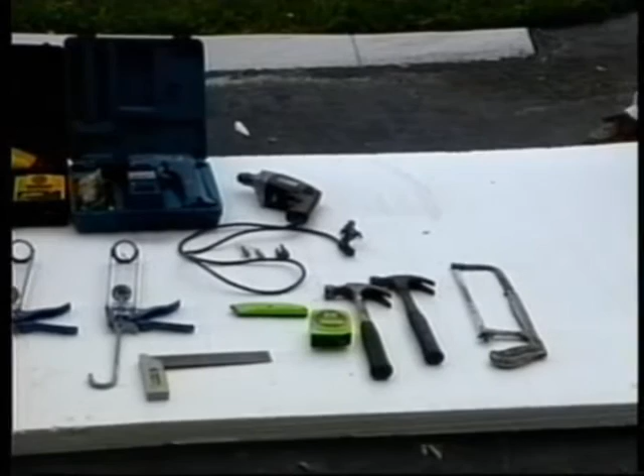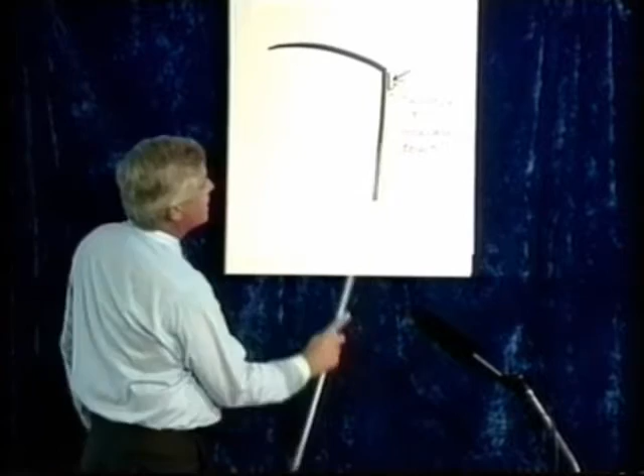The first application of the mobile home roof over will be the side fascia. This T-shaped piece is what we refer to as fascia. This area on top is 2 inches. This little area, known as the drip edge, is 1 inch. The face of the fascia is 6 inches. This piece belongs here. However, generally, you'll find that the drip edge or the awning rail protrudes out.

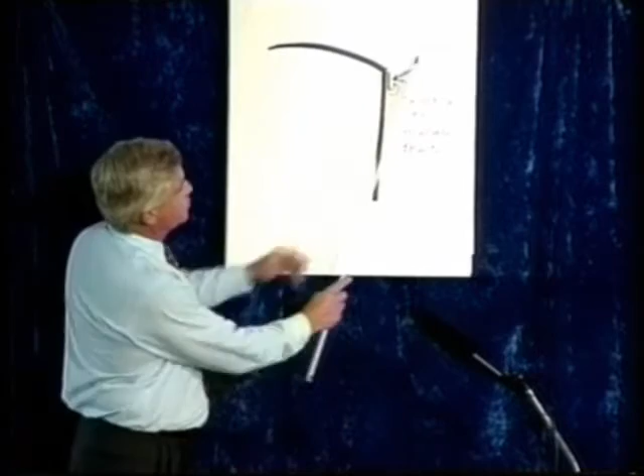Sometimes there's a gutter there. That has to be cut off if it's an extruded piece. But if it's a roll-formed gutter, if it's a flimsy little piece, that can be hammered in or hammered down. So this is a very important piece, which allows this piece to fit flush up against the side of the home.

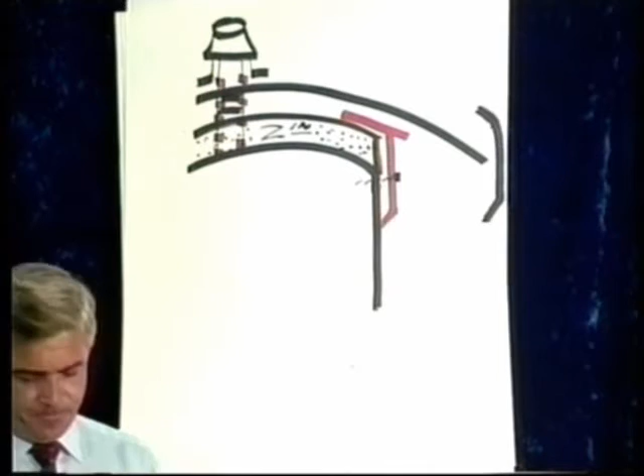All right, this is the existing mobile home roof over as you saw on the previous page. The drip rail was right here. This red area indicates that fascia we talked about, 6 inches from here to here, 1 inch drip edge and 2 inches which is covering the foam. What you do at this point is you take all of the fascia, which is the red, and you lean it up against the home.

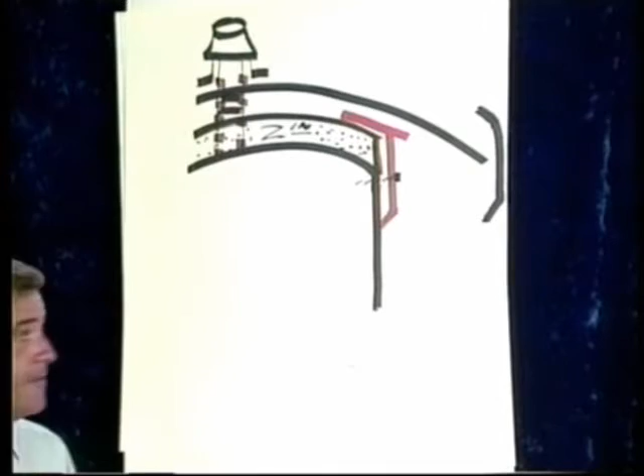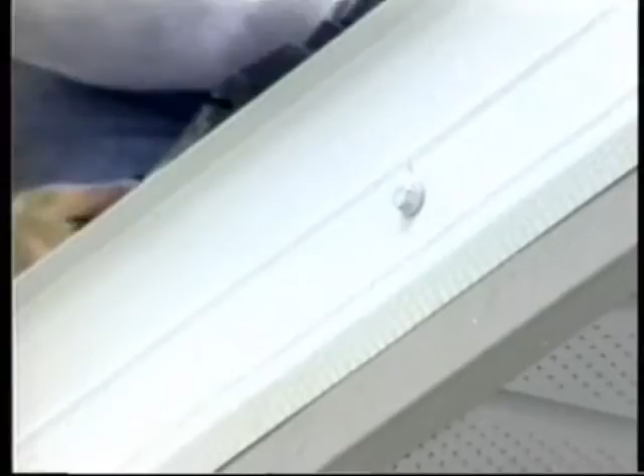Make sure that you take each piece of fascia, which is 14 feet in length, and you mark on the face of this fascia every foot where you'll be placing the nylon-headed bolts. So when you're installing this, the nylon-headed bolts are installed a foot apart, and that way the job looks nice and neat as you go through.

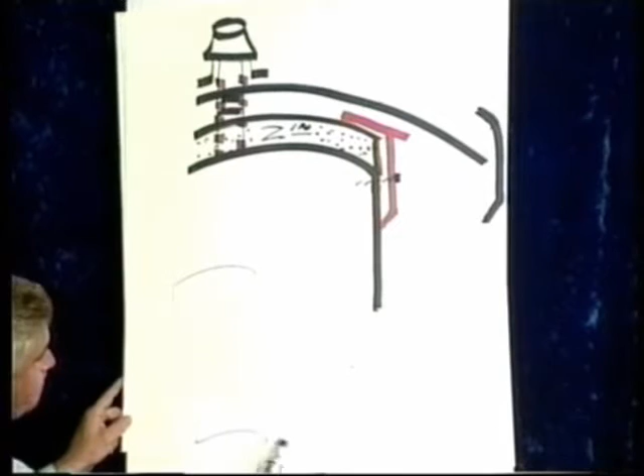But before you make that installation, take 1 piece of foam up there with you. You lay it lengthwise. In other words, if I'm looking at the mobile home from up above, and you're going to put the fascia down this 60 feet, that piece of foam is going to be like this. And you're going to lay this piece. You take this piece of foam, move it over here, and you lay the next piece, and the next piece, and the next piece. Because you're only going to use 1 piece of foam to gauge the 2 inches from the existing roof to the top of the fascia.

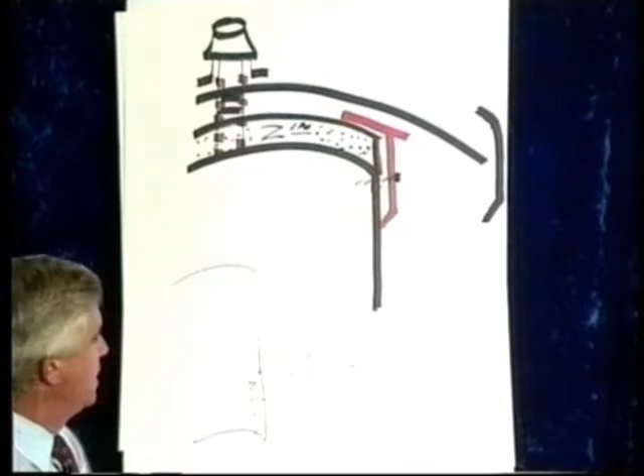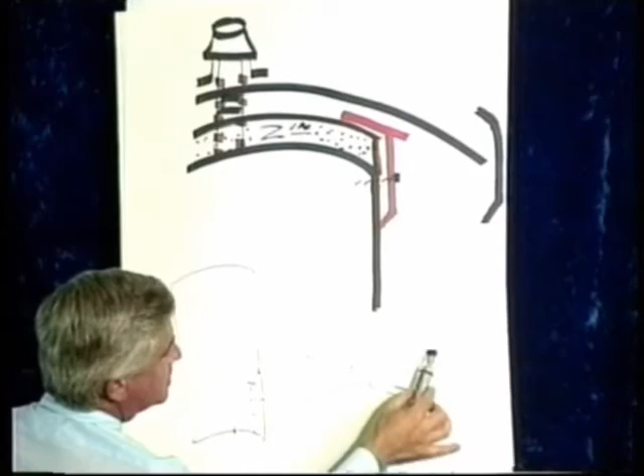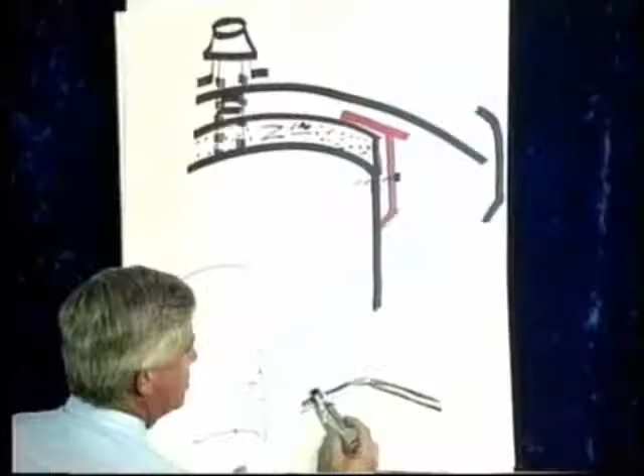When you're installing the fascia, you can start right at the peak, or right in the middle of the single wide, for instance. If this is a single wide, you can start right here, come down to the outer corner, snip the top of the fascia here and here, and wrap this around the side. So now you're running down here. And what you're doing is actually taking this arch like this. And now, with the fascia, you're able to gable this home so that it has the appearance of a newer home today. But only the front panel will do this, because all of the other roof over panels will be arched so that you can walk on the roof.

But right now we're concerned about putting the fascia completely around the perimeter of the home. So again, let's start in the middle of the single wide, run down to the edge, putting your bolts in 1 foot apart, snipping the fascia only on the top and the drip edge and the back side, and flipping this around like this, and then running down this side here.

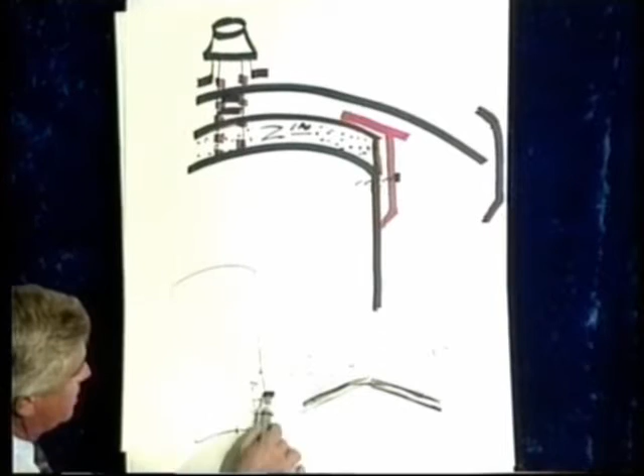When you get to the back, you do the same thing, running this piece back here, and where they meet, you just fill in. So you've completely gone around the perimeter of the home. Okay.

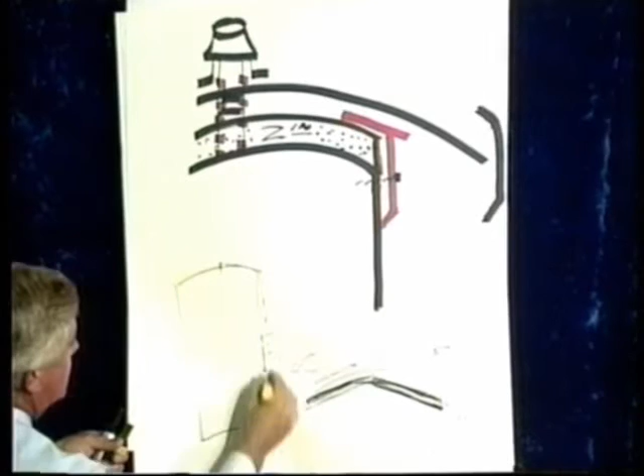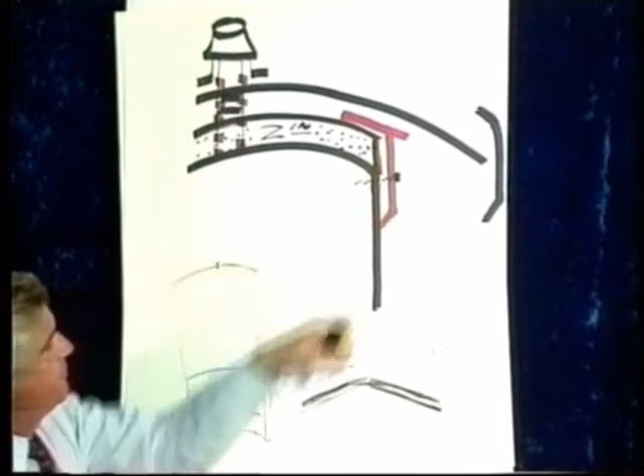Now that this is done, now that your fascia is on, this is the fascia. Now that the fascia is on and you have a bolt in every 12 inches, it's time to lay some panels. We're going to lay down 2 pieces of foam. Again, we're looking down on top of this house. That foam, which is 12 feet in length, for instance, will run from here to here. That's the foam. And the foam will tuck underneath the fascia, just like you have there.

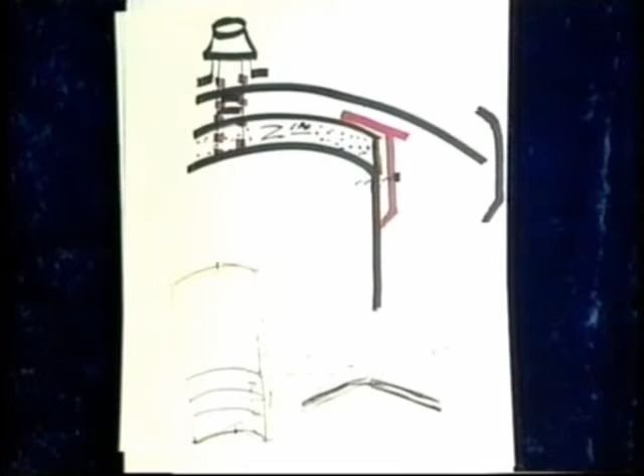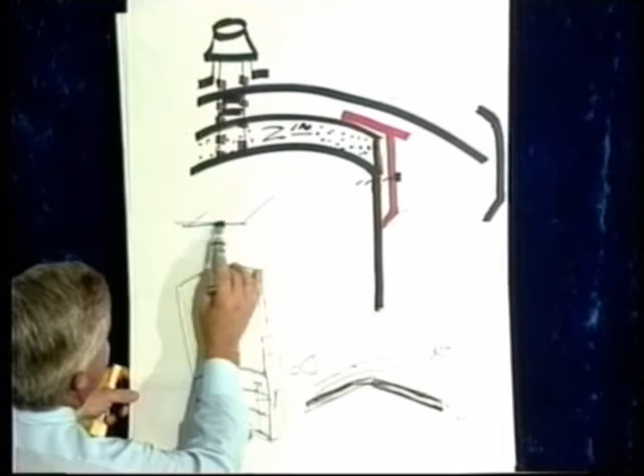The first panel, which is the key like anything, the first panel has to be installed square to the front. Generally, the overhang is about 4 inches. So if you look at your roof panels, you'll notice that the panels have 5 or 6 areas and 5 ribs. If you just have the second rib showing on your front overhang, that'll give you the 4 inches. So if you were to take a look at the front of the house, there's your fascia, like this. Your panel is coming out 4 inches beyond the fascia.

Each panel is factory sealed. You take a look inside of those standing seams and you'll notice a light gray caulk. That caulk will never ever set up. So in the event that you ever have to replace a panel because of a tree limb, whatever it might happen, those panels can be easily removed. And that sealant keeps the water from infiltrating the home.

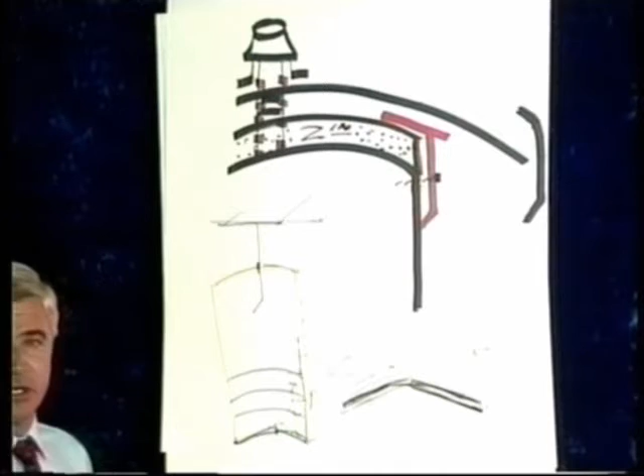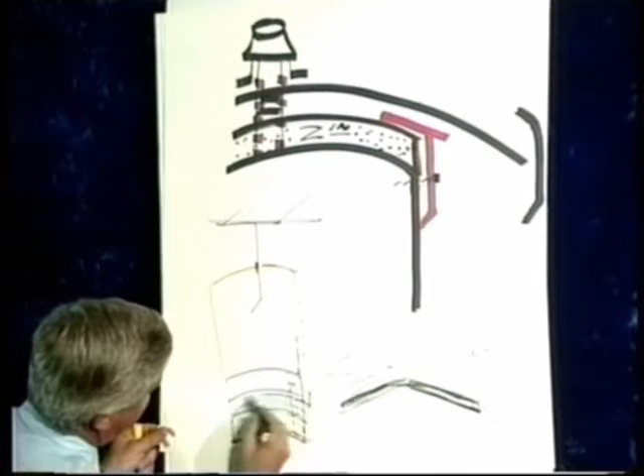When fastening a panel down, it's important that you, again, hit this area here. You can see in the pictures that you constantly fasten this down. The screws should be every 2 to 3 inches on the front of the home. And on the side of the home, as these panels are running, they're 1 foot wide, where your foam is 4 feet wide. There are 12 fasteners per panel. There are 6 per side.

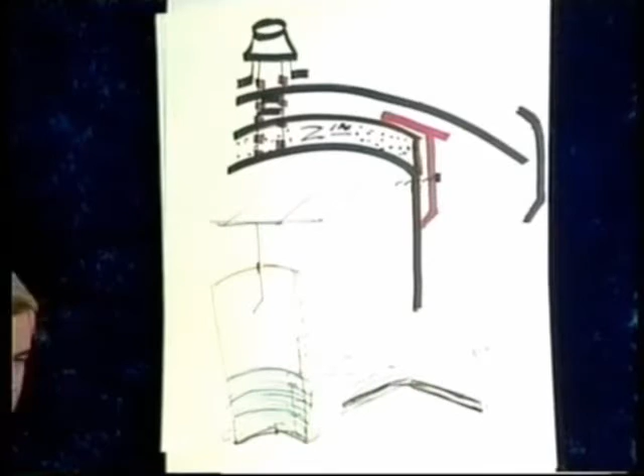And when you get that first panel in place and you go to set your second panel, it should take 2 people, 1 on each side. 1 person has the tape, constantly measuring from this point underneath that drip edge to the outer edge of that panel. Should read 6 inches if you've allowed for 6-inch overhang. 1 person is measuring each panel as they put it down. Then on top of that panel you have 6 fasteners. Those are the fasteners with the neoprene washer on it.

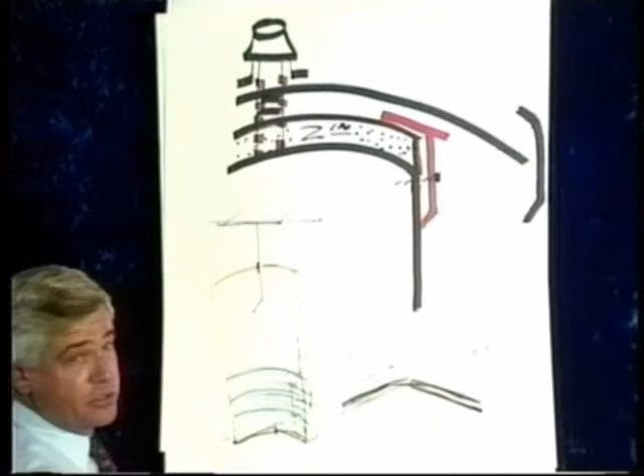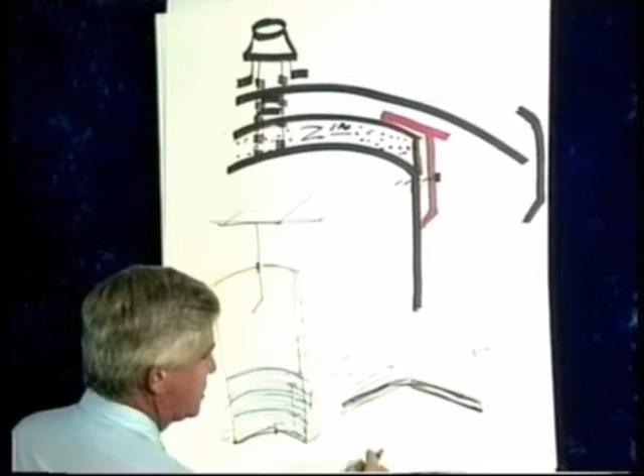When you're installing your first pan, since we have taken the arch out of the appearance of that single wide, and we've now given it the appearance of a gabled look, only that first panel will be snipped on the standing seam. So let's draw what the pan would look like. Here's your standing seam, like this. Well, as it's going up to this point here and coming down this side, you're going to have to snip it to allow that to happen.

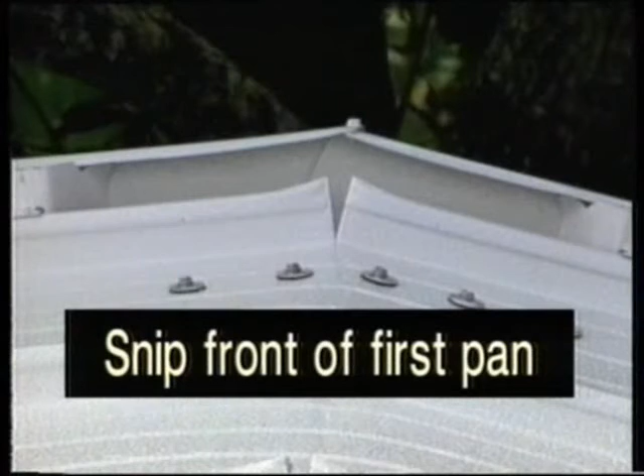Now, in most cases, this part here will arch over without having to snip it. But on the front, for that gable, it will have to be snipped, and that'll give it the new conventional look. But from here on out, all the pans are arched. Every panel will be arched.

Interesting thing that we do at Madden Manufacturing is that when the job orders come in, the salesman will tell us that the home, for instance, if you're looking at the front of the home, from here to here, in other words, this is an imaginary line from this corner to this corner, and this might be 6 inches from here to here. These machines will arch that panel to fit that home. Every job is custom made.

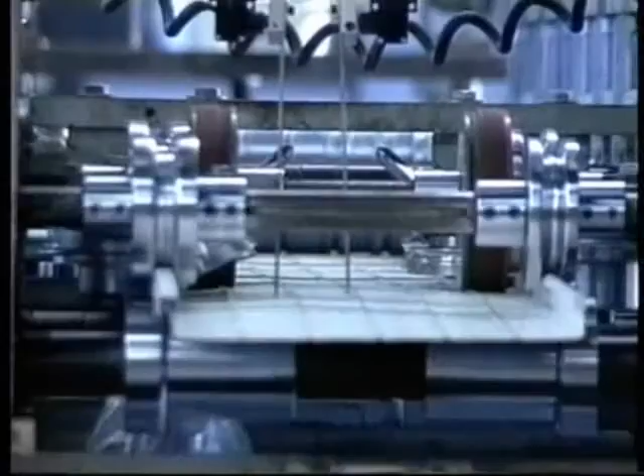So it's up to you to tell us what you need, and we'll manufacture it that way. Because if it's custom made, the jobs go along much easier, they look much better, and the referral business is great for the salesperson.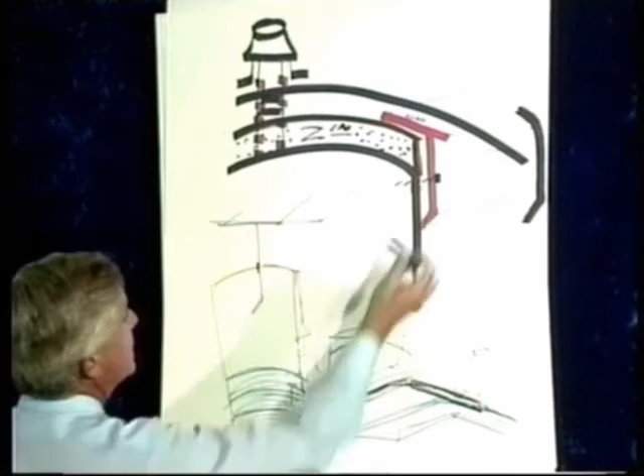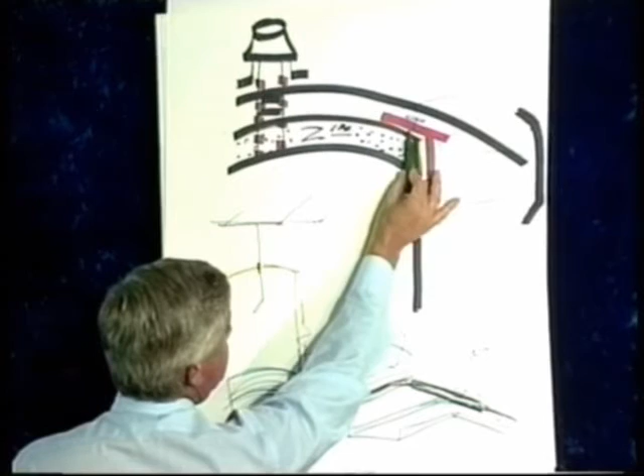You'll notice in your box of materials that there are several tubes of Permaseal. Permaseal is an adhesive, and that adhesive goes right on top of the fascia. One nice bead of adhesive, and then the fasteners will go through the adhesive into the fascia. Be careful now to hold those fasteners back away from the drip edge so that you don't have your fastener coming through the outer edge. You want it back, just back in a little bit, maybe about a ½ inch from the face. And this will be your screw here.

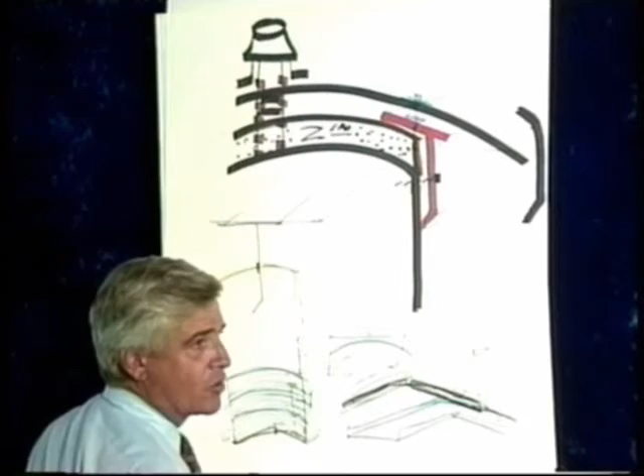So not only is each pan fastened with 6 fasteners per side, but it's also glued down. And it does 2 things. It holds it in place because we have to meet 120-mile-an-hour wind loads, and it also keeps the water from backing up. That's correct, 120-mile-an-hour wind loads in order for us to sell the product in Florida.

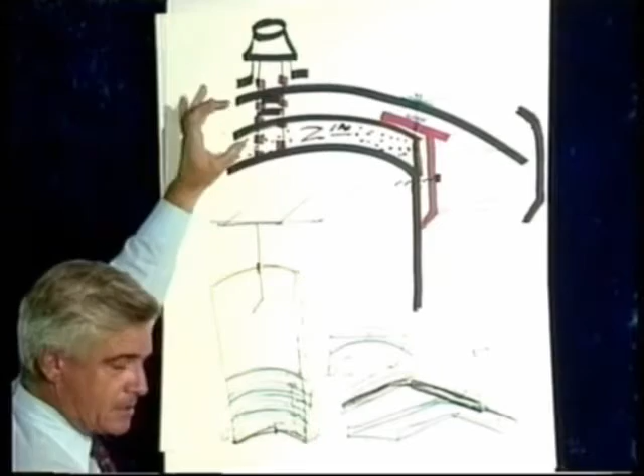All right, and when we get to a vent situation, and you contractors understand there's about 1.25 inches, 1.5 inches as far as the PVC. What I would like to see happen is that the existing PVC extend beyond the 2 inches of foam. And in most cases, when you remove the old breather vent, you'll find that the PVC pipe is far enough beyond the insulation that it'll go up on top of the panel. And that way, when we put the new vent on, we can seal around the PVC and the new roof.

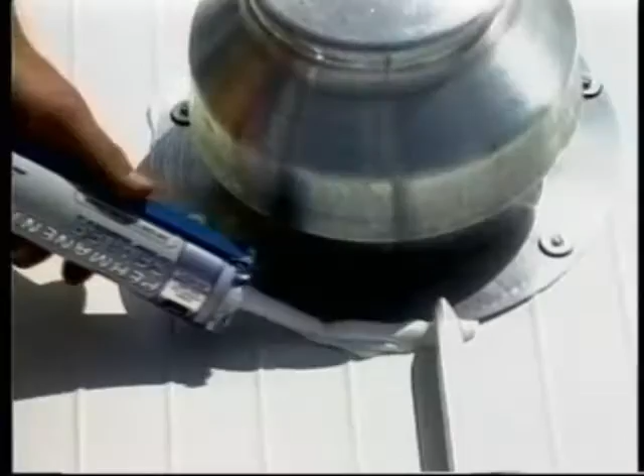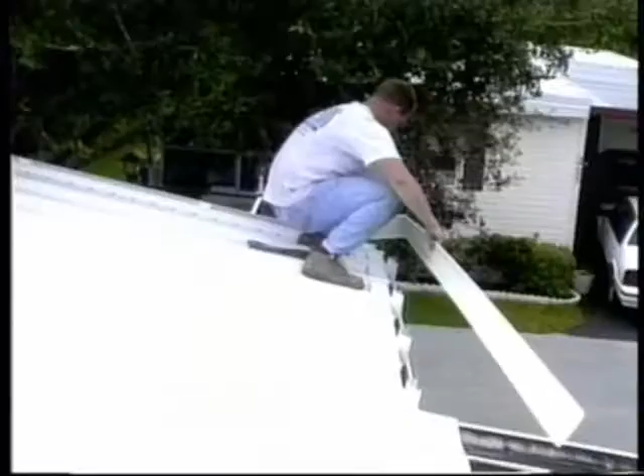And then we put the new pan on. So this is the pan, this is the vent, this is the new vent that would sit on top, your C-trim, just to kind of give you a general idea of what we're going to talk about.

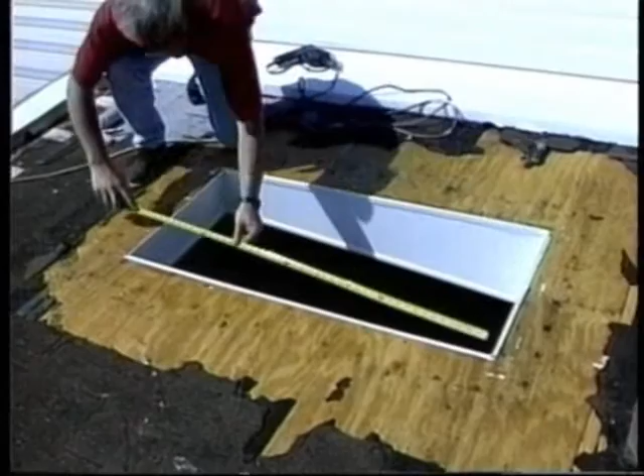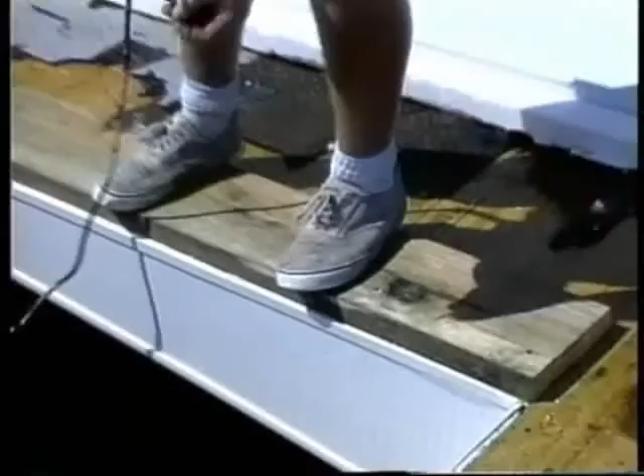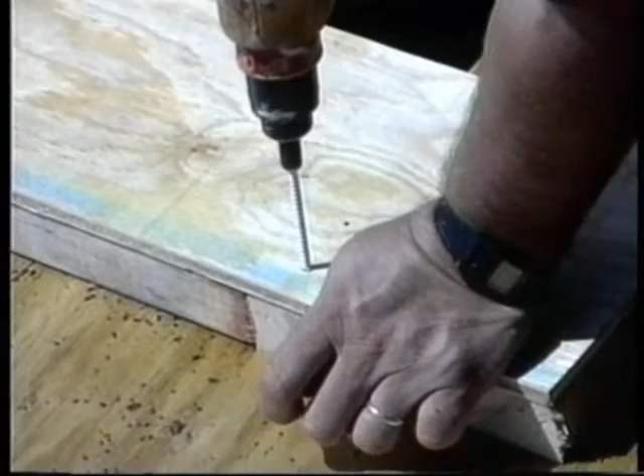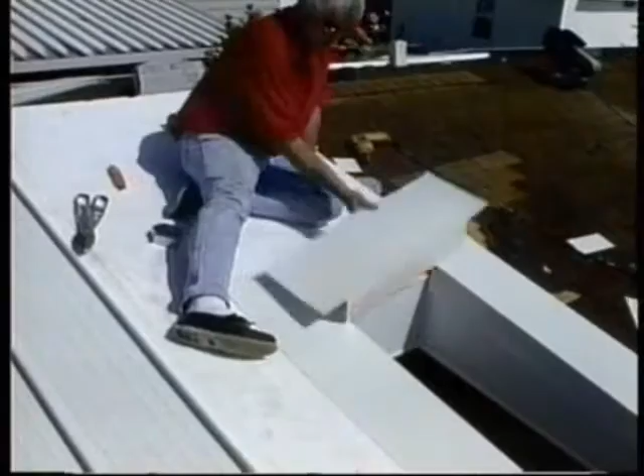Well, we know a 2x8 is about 7.5 or 7.25 by 1.5 inches. But we're using 2-inch foam, so we need to make up another ½ inch difference, and that's where the ½ inch ply comes into place. So what we do is we take this and picture frame this completely around with 2x8s and ½ inch ply. We also will send you coil stock, and the coil stock goes right on top of the 2x8s. So this is now wrapped in coil stock, this whole area.

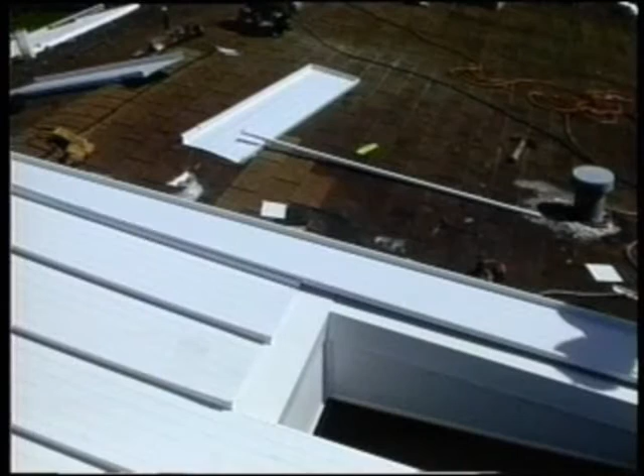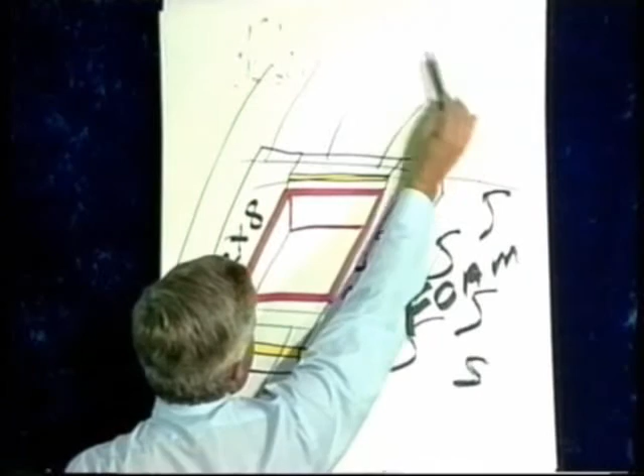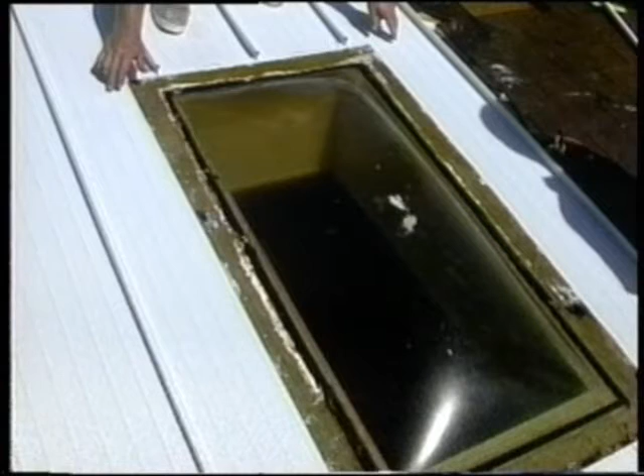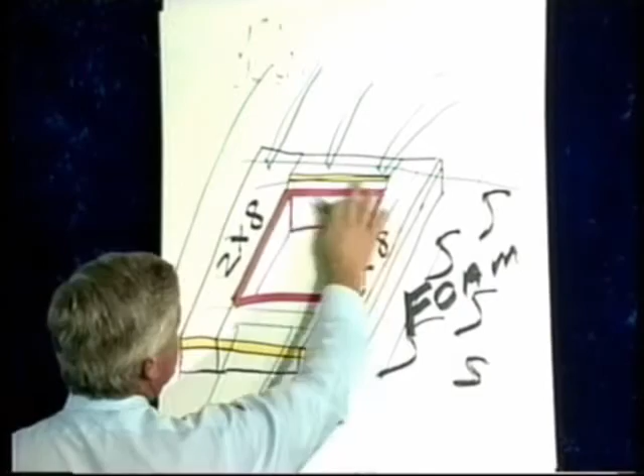So the standing seam of the roof panel will never come in contact with the bevel of the skylight, because if it does, the water will never travel around the skylight and will dam up here, and we've got a problem later on. So always hold it back. Now, with the Permaseal underneath these roof panels, when you go to put your fasteners in, you now have something to put your fasteners into, which is the ply and the 2x8. And that's how that's done.

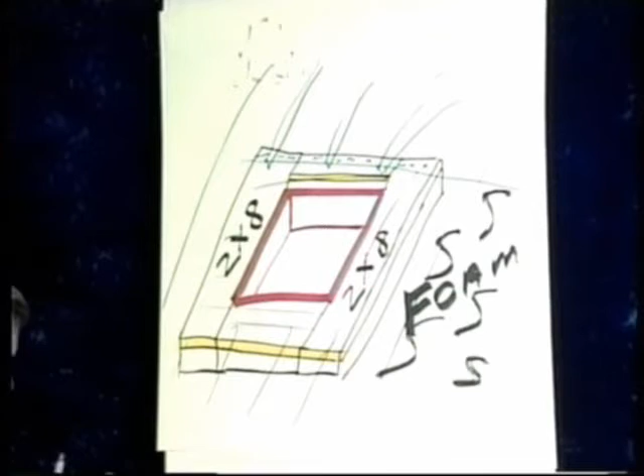After your 2x8s are on and your coil stock is on, you put your new skylight on, and then you run your roof panels right on through.

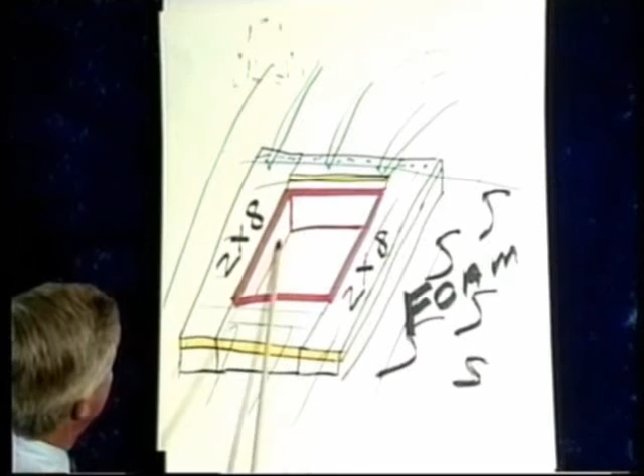Let me talk about finishing off the skylight. Once you've done your coil stock and your 2x8s and your ply, you're going to find there's going to be a slight void around the inner skylight area. Simply take some coil stock. You're going to have some material left over from the roof. If you've got a good straight 2x4 or a flatbed pickup truck, you can bend the metal there, and you can place it around the inside of the skylight area, generally in this area, with some good silicone caulk, and I think it'll be acceptable by the homeowner.

But take a look at it, analyze it, see what you think you need, and make sure that everything's ready, because when you get through that skylight area, you never want to go back onto the roof that you've just finished. You want to complete it as you go. And that includes the vents, like I had mentioned earlier.

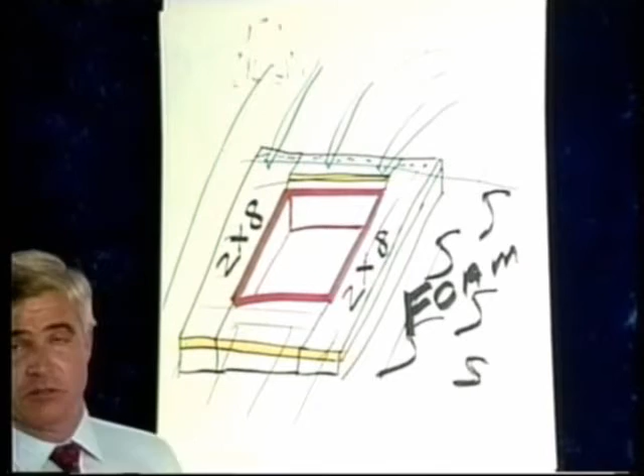Let's discuss a room addition that is built on to a mobile home. Or this could be a carport or a patio cover. The interesting thing here is that we're not able to install the fascia the way we discussed earlier, because you need those nylon-headed bolts to go into the top frame of the existing home. So what we've done here, again, we've talked about the 2x8s and the half-inch ply with the skylight. Well, the same thing would apply here.

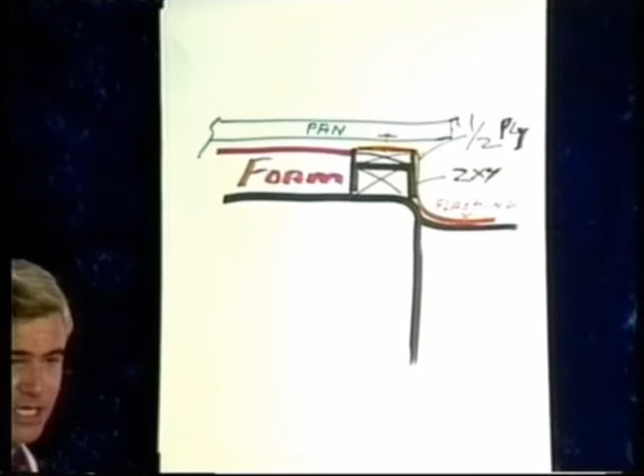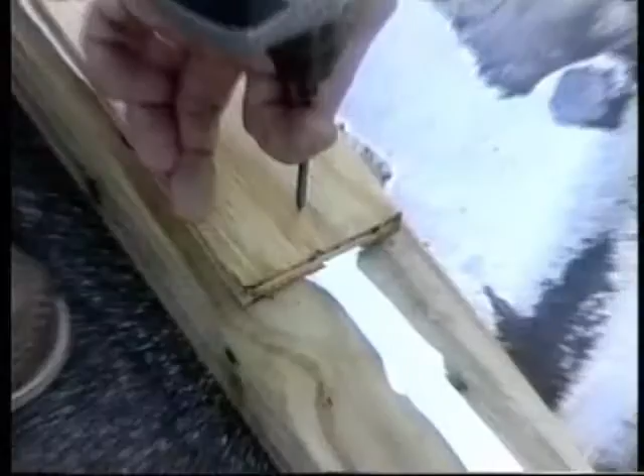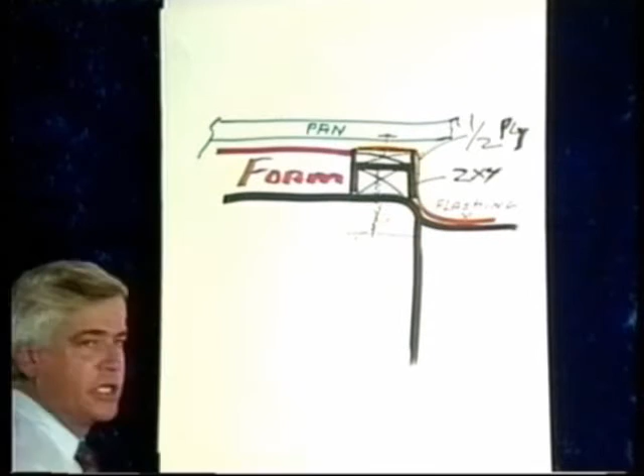You have a 2x4, half-inch plywood. You now have a full 2 inches of wood and your foam. Now, naturally, you're going to have the wood fastened down into the top plate of the existing home. So these are all screwed down with fasteners to hold these in place. It's not a bad idea to use Permaseal between the 2x4 and the old roof, between the ply and the 2x4, between the flashing and the ply, and between the pan and the flashing, just like a big sandwich. And what you've done is actually sealed everything with a caulking and glued everything together.

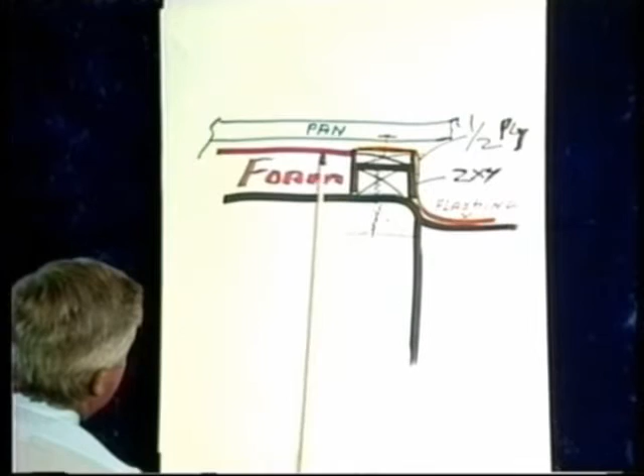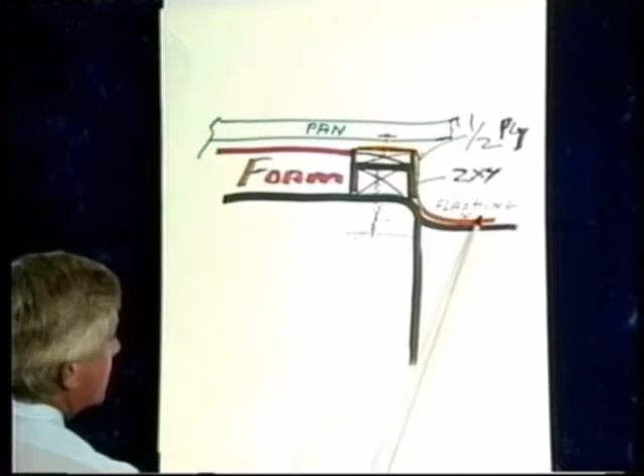So let's take a look at this one more time. This is the existing home. We can't put the flashing or the fascia on here and put a bolt in. So how do we attach a new roof? You have to build this up with 2x4s and half-inch ply. You're going to sandwich this all together with Permaseal. Now you've got a full 2 inches of wood. That's your foam. You're going to put your flashing down and onto the patio cover, carport, or room addition, or whatever this might be over here. Put some fasteners in. You lay your pan on top of that flashing, and you fasten down.

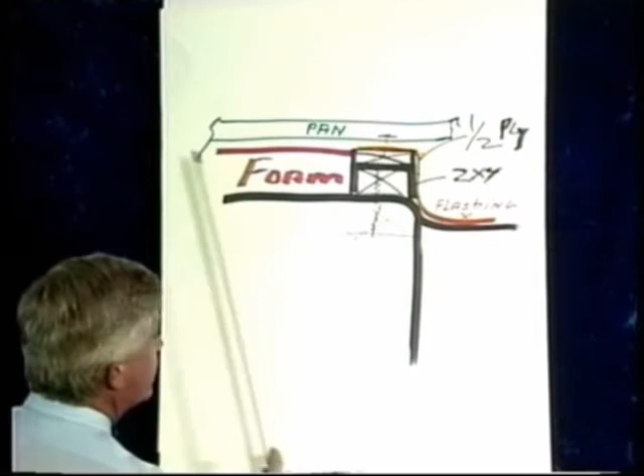That's the way this situation is handled, because there's no way that we can get our flashing, our fascia, on the home because of the addition. So this is where it should go, but we can't put it there. If you have any questions, just review this, and we also have some information in the catalog.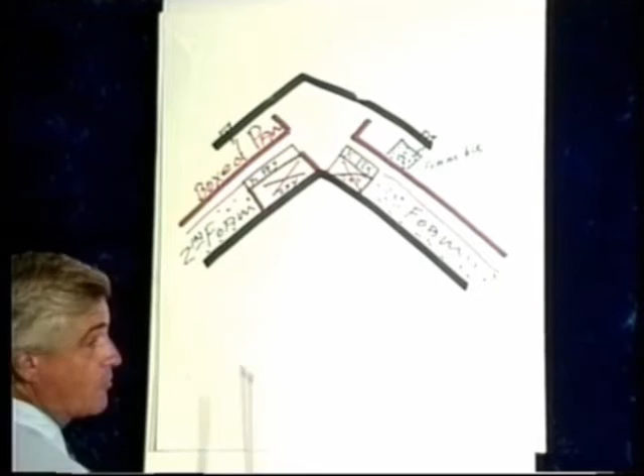So when this job comes into you, as we said in the beginning, check that packing list. Make sure everything is there to do the job. Don't forget the wood. Don't forget your plywood. We don't ship the plywood, we don't ship the 2x4s, and we don't ship the foam. So make sure that all these items are there. We will send you the box pans. We will send you the styrofoam blocks. And we also will send you the ridge.

Once the 2x4 and ply is in place, then your foam goes up against the back side, down to the fascia, and let's pretend we go like that, and this is the fascia.

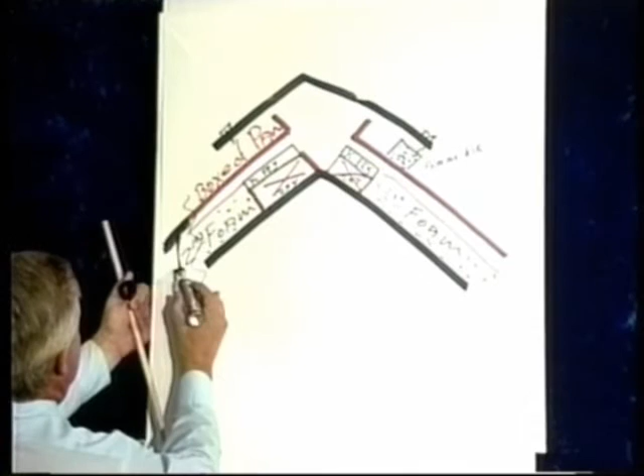Remember that? Your fascia bolts, they're put in every 12 inches. The roof pan is put on. There's permaseal on top of the fascia, and this pan is going to extend 6 inches out if it's sold with an overhang, which it should be.

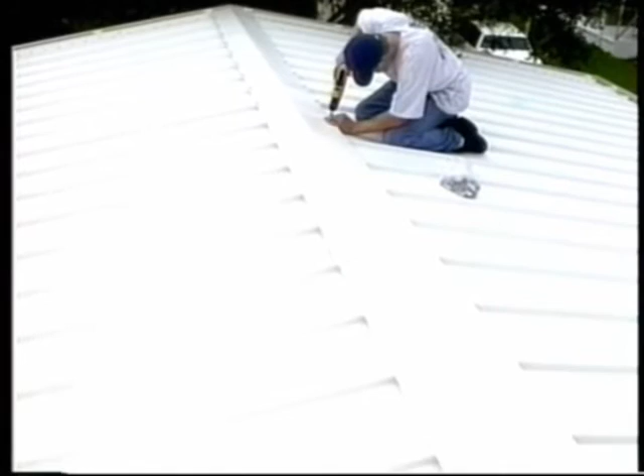And once this pan's in place and this pan's in place, the next item is to put your ridge cap on. Make sure it's nice and straight and true. Use a pan fastener, that's the ones with the washers, on top of the standing seam. So this is setting in place now. The last thing you put on are the foam blocks. And usually the foam blocks are put back in about 1 inch from the edge. Keep them out of the sun, so about 1 inch from the edge.

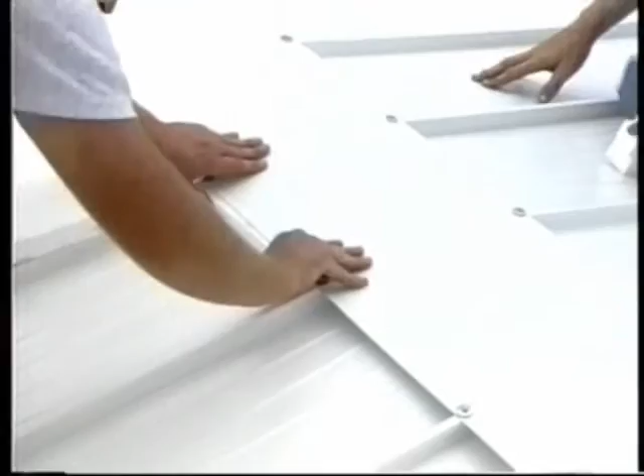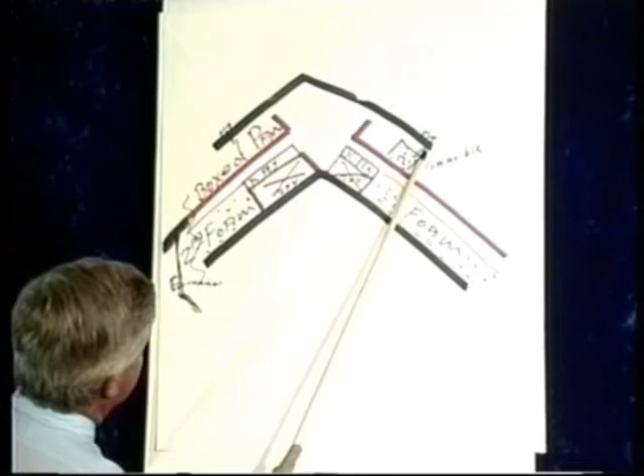Now, here's the reason behind this. In the rain, the ridge cap is your first line of defense. Your second line of defense is your foam block, which keeps the water from blowing up in here. And if it does get by this foam block, it's going to have about 3 or 4 inches of void, and then you have your boxed panel. And this actually is going to be sitting on top. So it'll be very difficult for a high wind to blow any moisture into the ridge cap area.

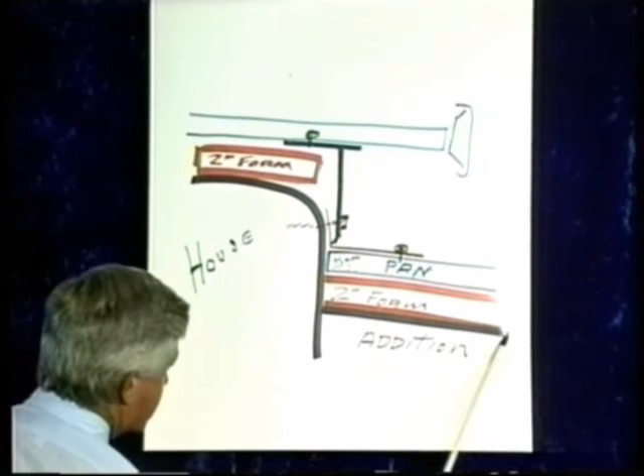Let's talk about an addition on the home, where the addition is not level with the existing roof, but down, so we can put our fascia alongside the home. We're not using the 2x4s and plywood this time. All right, this black line represents the existing roof. This black line represents the addition attached to the home.

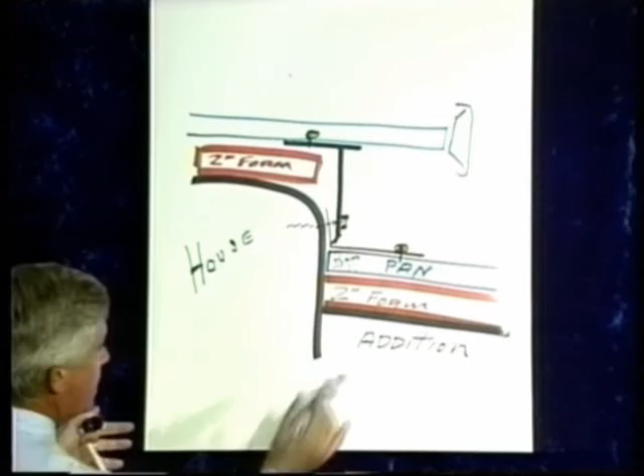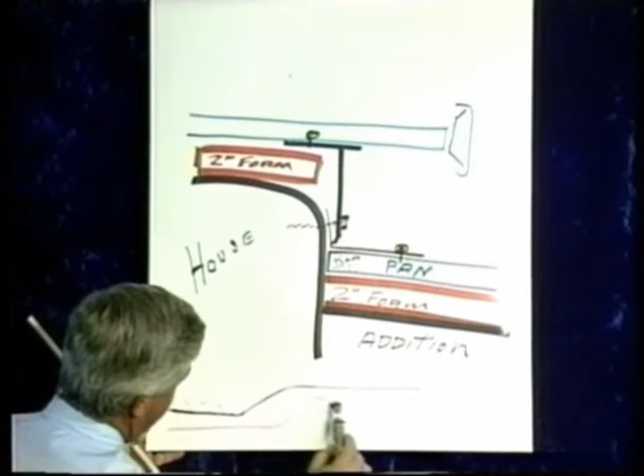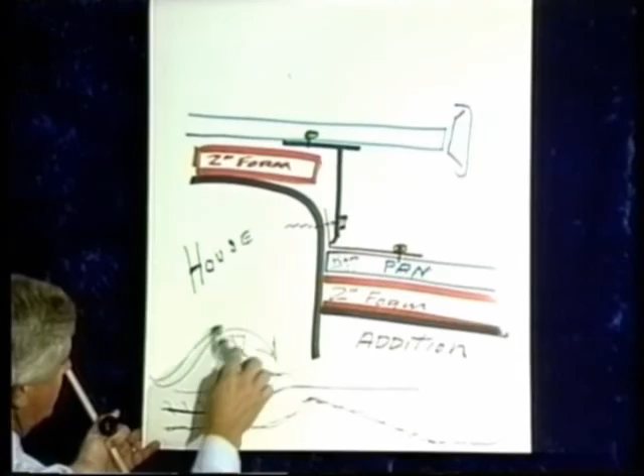Always, always, always do the lowest part of the roof first. The lowest part of the roof in this area happens to be the addition. But if you even had a home that went like this, you're going to do this first. If you had a home like this, you're going to work both sides to the top and then cap that off up there. Now the reason for that is if you start from the low end, your standing seam is not going to allow water constantly beating away at the sealant. The water will actually go this way, and that's the way you want the water to go. It'll cascade over the standing seam correctly.

So what we have here is the addition, 2 inches of foam, our boxed panel, our flashing, and once the flashing is on now, this addition's done. It's finished. Then we go to the main home and we put the fascia on over the flashing. These nylon-headed bolts, which are installed 12 inches apart, are going into the top header of the existing home. Don't forget now, you've got to gap this 2 inches, or whatever the thickness of foam has been sold. I would say that 999 jobs out of 1,000 are sold with 2-inch foam. 2-inch foam is pretty much standard in the industry.

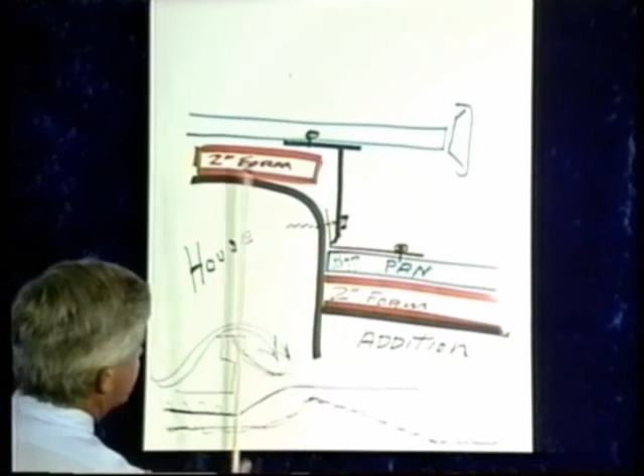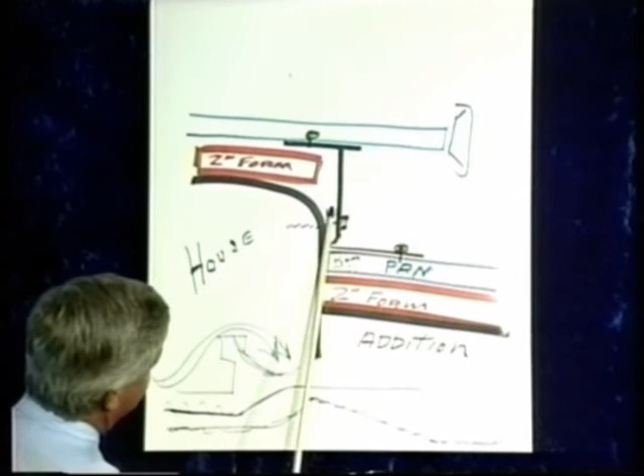So once your fascia's on, you can start putting your foam in, you start laying your pans, and this is the way you would treat an addition that is, let's say, 6 inches or lower from the existing roof. We'll break all this up for you, so we need to know what the dimension is from here to here, so we can ship you all of the coil stock, or we'll break it up for you.

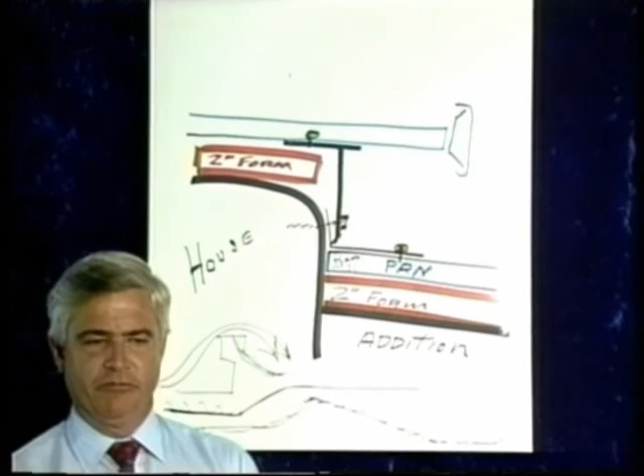Let me take a moment to talk about furnace flues, hot water flues. As you're progressing with your roof, you're going to come up against a furnace flue or a hot water flue. That flue should be removed and reinstalled. That flue should be reinstalled by a licensed heating or air conditioning contractor. It's very important that you protect yourself if you're not sure of what you're doing when it's involving a furnace flue.

And as far as the other items to watch out for, there are the high tension wires. Many of these homes have high tension wires running across them. There are trees and so forth, so just be careful when you're installing these roofs. Take a moment, look around at the job site, and make sure there aren't any hazards. And if there are any hazards that you're not feeling comfortable with, call a professional in to take care of it. Because these roofs are designed to protect the homeowner, but we also want you to be safe in the course of the installation.